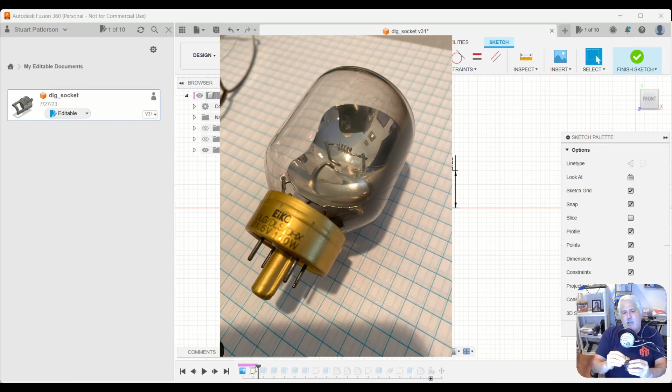So I took measurements from the original bulb, and from those measurements I went into Fusion 360 and laid them out. If you've never used Fusion 360, I highly recommend you get it. It's free for hobbyists or students. It's awesome. So what I did was I went and I took those measurements, and then I did what you call basically extrude.

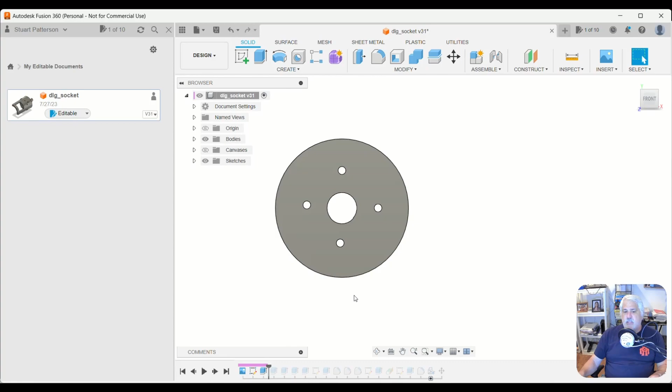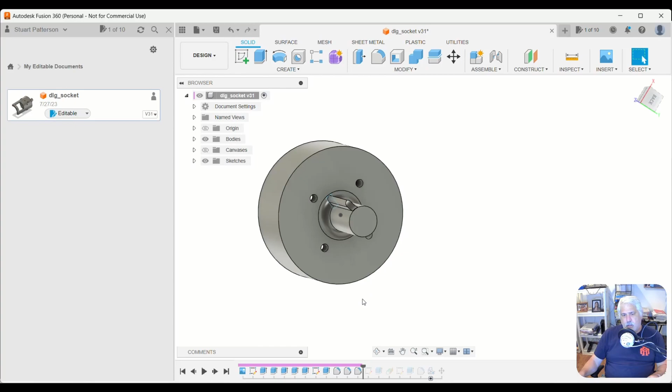I extruded the pieces, and through the process of extrusion, I started to build out what we needed. Notice that on the bottom here, it's keyed, so it only goes in one way. So I then added the key, went through and made some adjustments to it by creating some fillets so that it was nicer looking and rounded and not as sharp edged.

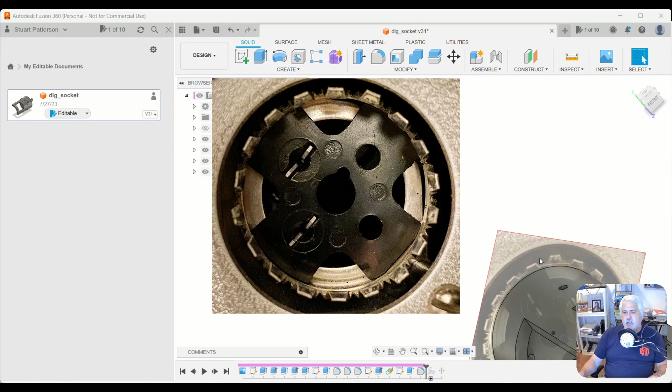And then one of the issues that I found out that I had was getting the alignment right. So I actually went and I took a photo of the plug. Let me see if I can get this where we can see it. Let me turn off the bodies. Yeah, so I took a photo of this.

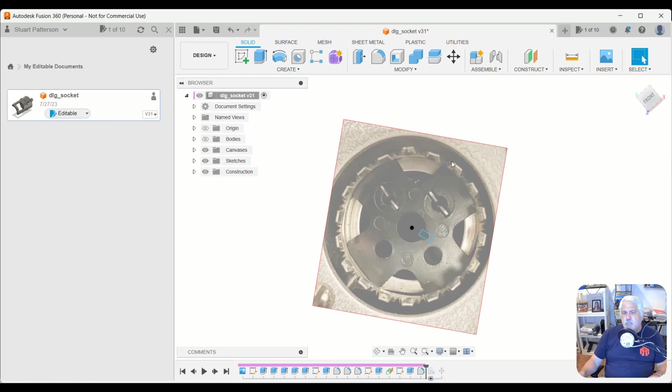And from that, I saw this is the key location. This is where the power is coming in, this is the AC power. These are just structural - they're not actually connected to anything, though you can put pins in there if you want. And using this as my model, I scaled it to the body I had created.

So then if we look at the bottom here, you can see that I actually got the key - there's the key right there. So then I went in and drew the key, and now you can see it won't fit, but then I went in and made some adjustments to it, so now it fits. That was a real key, pardon the pun, a real trick to getting this to work, because I was doing a lot of guesswork and it just dawned on me, take a photo and lay it on top.

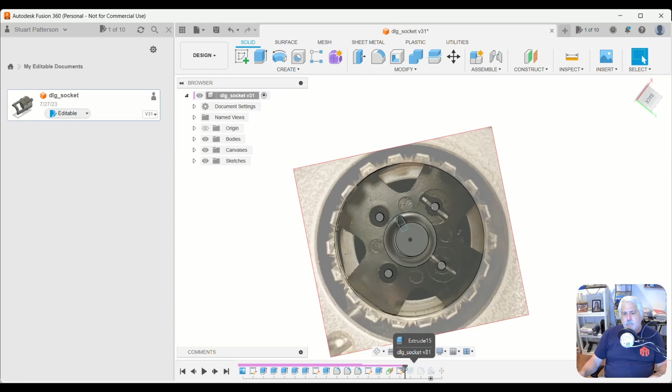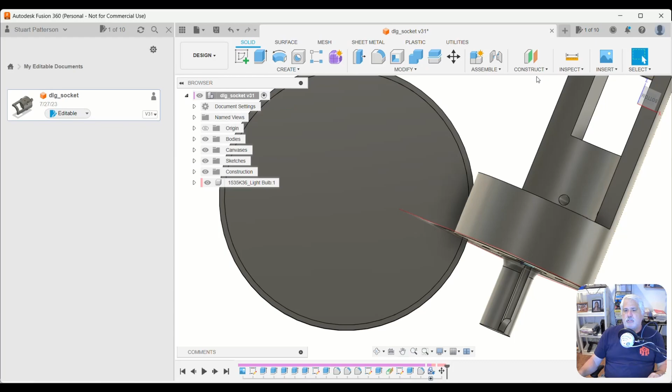So when it's all said and done, we end up with this piece. Now, there's also a bulb here. You can basically, through Fusion 360, go to the McMaster-Carr site and download drawings for certain things. So I looked for the bulb, and sure enough, they had it.

This is the bulb. They probably have the socket too, but I haven't done anything with that. I was going to use it to test the size of this hole right here, but I didn't really need to. I made a few modifications and didn't have any issues. But that would be a smart way.

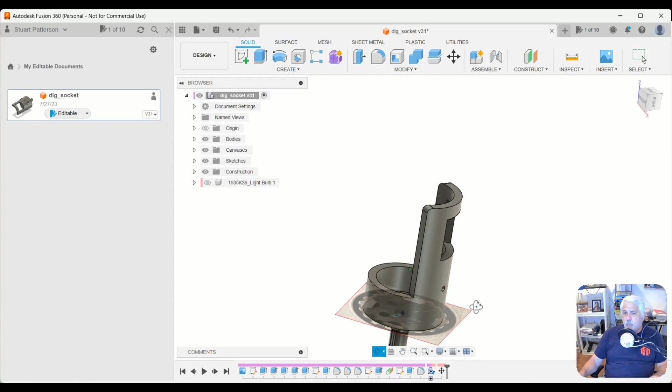You can actually tell Fusion to put this within this hole kind of thing. My understanding is pretty basic, but I'm learning stuff every day for Fusion. Then once you've got your design, you can go in and tell it to do a 3D print, and you can send that 3D print to a file, which is actually what I did.

I went into the other room where I keep my 3D printer and was able to print it. And we ended up, and we'll go over to the electronics bench, and I'll show you how you put one of these together. But this is the part right here.

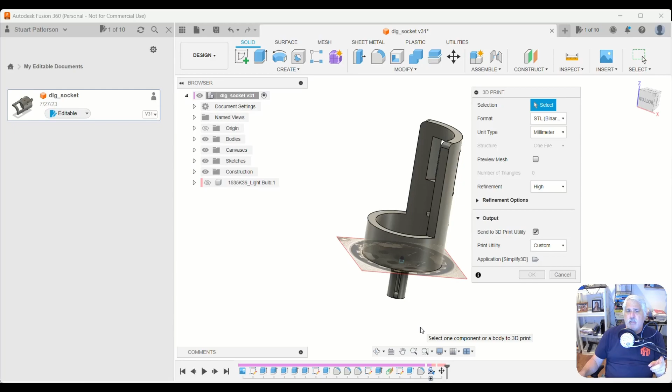All right, some things you're going to need to put this together. Going to need some heat shrink. This is the MR16 connector. This is our halogen. Note that it says 21 volts, 150 watts. And that is exactly what the original bulb was, 21.5 at 150 watts. This is AC, by the way, that's going through that projector.

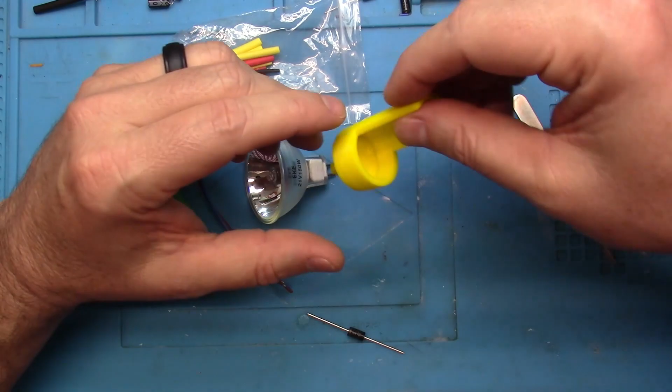Obviously the 3D printed part, if I didn't say that already, we're going to use some super glue, and I like to use baking soda as a hardener. Basically what it does is it turns to concrete with the super glue, and we're going to use that to put the legs in place and keep them from moving. The legs, I'm actually using the legs off of a diode. We're not going to use the diode, just the metal legs. They're stiff and thick. This is a 1N 5822 diode, and that's pretty much all there is to it.

So the way this thing goes together is this sits inside here. This plugs in, the bulb plugs in from the outside. Let me show you how that works. It gets pushed up so that the little clip legs are pretty much against the plastic, and that's what's going to allow it to fit. These are going to go through these holes.

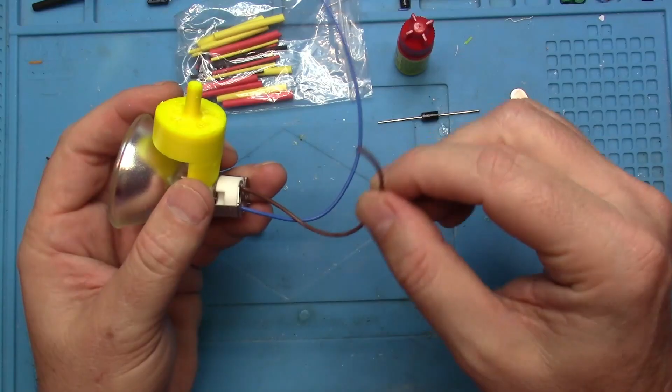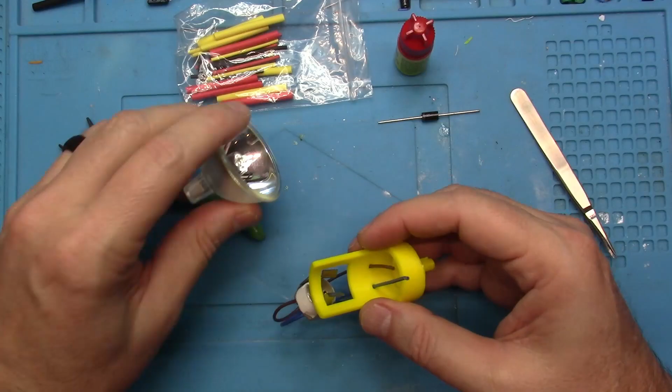And then we are going to solder them in place with the pins. It's really a simple project. So what you want to do is put your MR16 clip through and be able to bend it up like that. Give yourself a little slack here too, so you can always give yourself more than you need. You can kind of see where I cut mine.

Right there. So now what we're going to do is strip those, and we are going to clip the legs off of the diode.

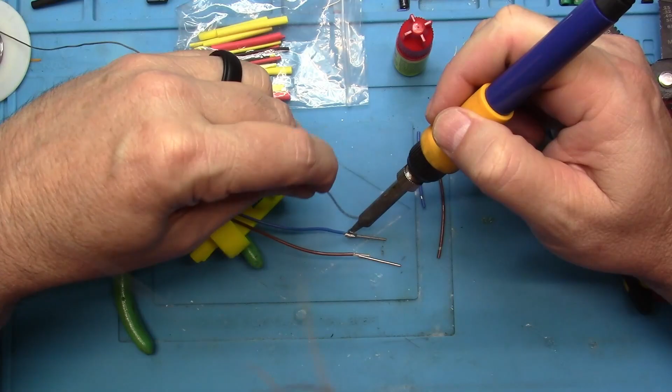We are going to wrap a leg around each wire. I just kind of like do this with it. And then I'll come in and hit it with some solder. Since this bulb is getting AC, it doesn't matter, there's not really a positive and a negative in this case. But I want to be able to solder this. That's not bad, that should work. And then we'll do the same to the other one.

Looks like I'm going to have to move that back into place. It's probably very hot now. Looks like I got a straggler there, I'm going to cut that off. We're going to cover this anyway with heat shrink, but I just want to make sure these are good and on there.

Okay, get yourself some heat shrink. You probably only need one piece, and you can even cut it in half. I'll slide the heat shrink over this, exposing more of the leg, because we're going to need to push the leg through. Let's go ahead and hit it with some heat.

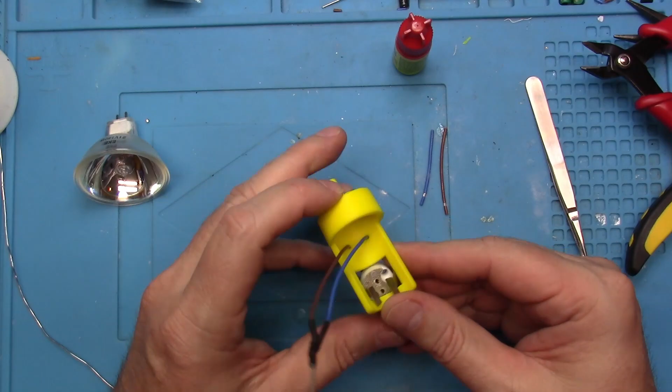Okay, now we need to place each of these into the appropriate hole. Those are kind of marked, they have little circles on top. We're going to push it through. Hopefully you can see what I'm doing, I'm pushing them through the holes.

Yep, there we go. Now I'm going to pull out some of the slack. That's fine, okay, so now that's almost done. What we need to do is leave about 8 to 10 millimeters of leg sticking out. So that's a little short, but it'll work.

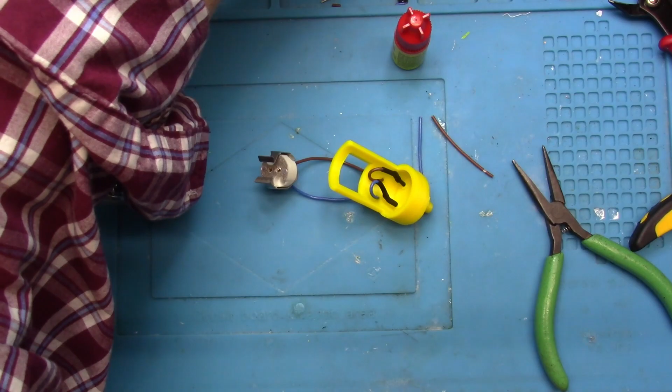Okay, now what I'm going to do, this is the interesting part if you've never seen it. I'm going to take some baking soda here, I've got it off to the side, and I'm going to pour it in and pack it around. They actually use this, I found out about this for fixing guitar frets. I thought it was a really neat idea. So what happens is you hit it with some super glue, hopefully there's some in here, and it dries immediately.

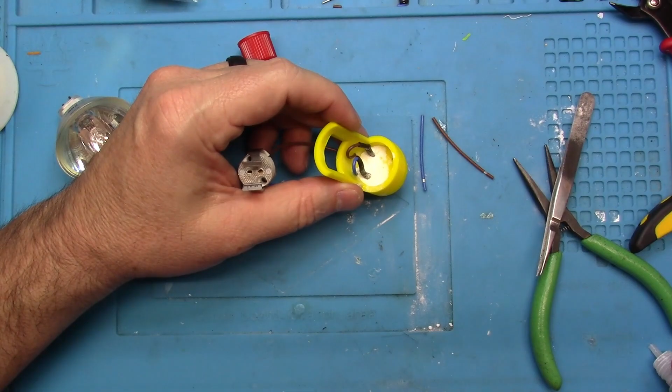Okay, I'm going to need some more super glue. Let me see if I've got another container. One second.

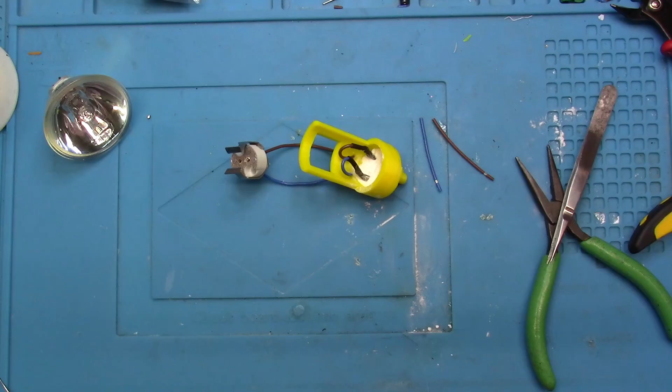All right, so dollar store actually sells super glue, $1.25 now, I believe, and you get 2 of them. I always try to keep some handy.

Okay, so basically as soon as this stuff hits, it starts turning everything into concrete that's around it. It hardens the baking soda, creates concrete basically, it's amazing. I'll show you in just a second when I'm done. So I'm kind of trying to soak the whole thing. I think I over-soaked it even. You can kind of look up inside there. And again, this is how they fix frets. Frets are constantly getting worn as you play a guitar, and this actually creates a concrete. It's actually a pretty good trick. Of course, you could use like an epoxy or something else, it's just what I chose to use because I use it often for things.

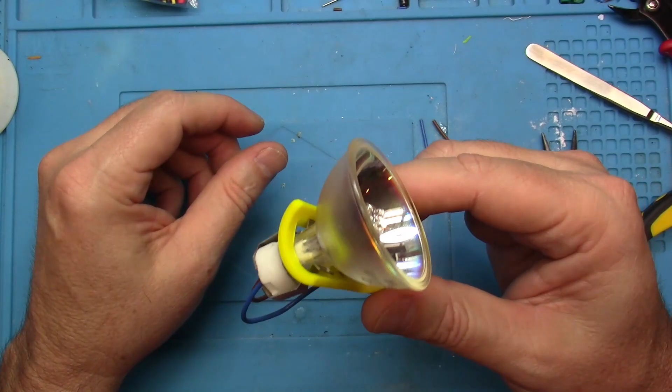Okay, that's all there is to it. So if we take the halogen bulb and we were to push it in, push it back a little bit, now it will actually fit into the projector and it will work. This one is printed in ABS for heat, more heat sensitivity. All right, so let's go over to the projector and I will show you how you install it.

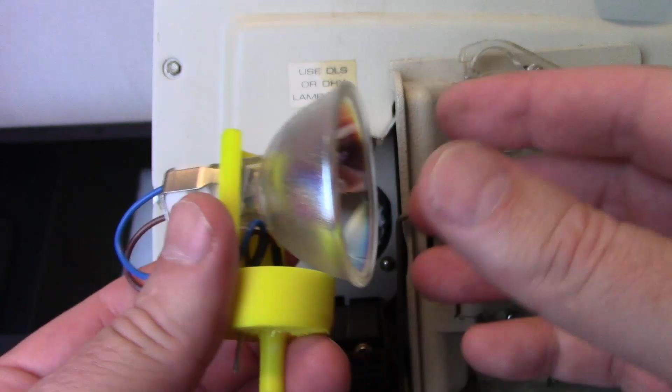Okay, so let's talk about how you're going to put these in. It's pretty simple. Once you've built one, all you need to do is take your new halogen, push it as far back as it'll go so it's as flush as it can go, and then you're going to push it in. It's keyed, you'll feel it get keyed, and then once it's in place, it'll light up.

Okay, I told you how important it was to pick up the proper material that had a proper HDT so that you don't have warpage from the heat inside the projector. Well, let me show you something. JLCPCB does 3D printing as well as PCBs. This is something new they've started to offer. And I'm going to show you just how cheap it is to get the right material.

The shipping to the United States through DHL is about another $17. So you're really looking at $20 for this part. But when you add that plus the cost of the bulb, which I've seen them as low as $10, I think I paid $14 for my bulb, that's a lot cheaper than a $100 DLS bulb. And this you can use over and over again. So anyway, I just wanted to point this out to you, that it's a good way of getting some 3D parts that you might want.